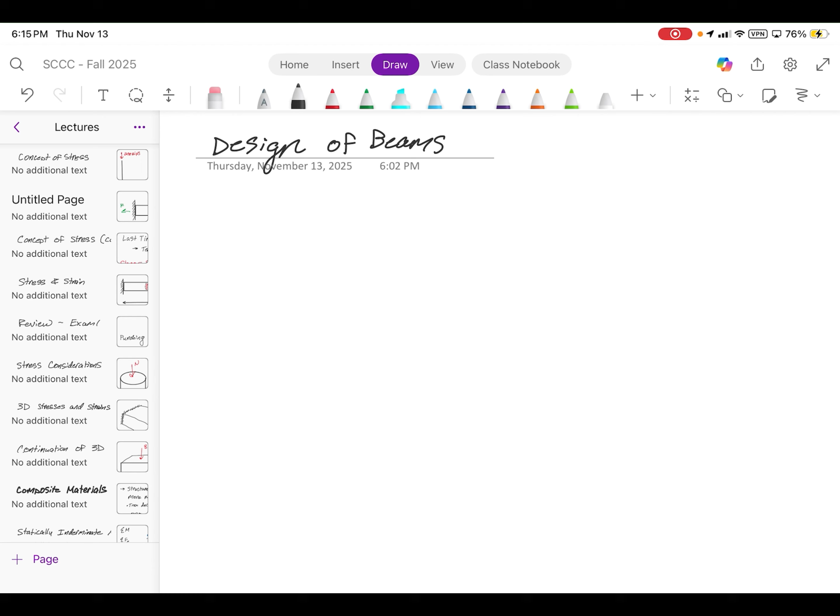So what are we doing after this test? Because I think on the syllabus it still says code-based design. Yeah, that's all on the Excel spreadsheet. I didn't upload it, but basically the outline for the course after we come back from break, because it's literally just the exam next week and then break for a week.

After break, we are going to work on deflections and beams. We're going to be working with torsion in circular elements. And then if we get to it, column buckling. These are all after break, which also are going to make up exam 4. They're just kind of miscellaneous topics.

Like I said, I wish I could put deflection of beams on the exam because it relates to the stuff we're doing right now, but I don't want to throw too much on there.

So at minimum, it's going to be deflection of beams and torsion, which torsion in itself, according to Professor Simon, out of all the years he's been teaching, has been the worst for students because they don't get it. They don't see that there are rotational forces parallel to the cross-section of the elements. It's also like introducing something new, where in statics you learned moments and forces, but now you also need to know torsions. But it's all the same concept - as long as you understand equilibrium and internal forces, you should be good.

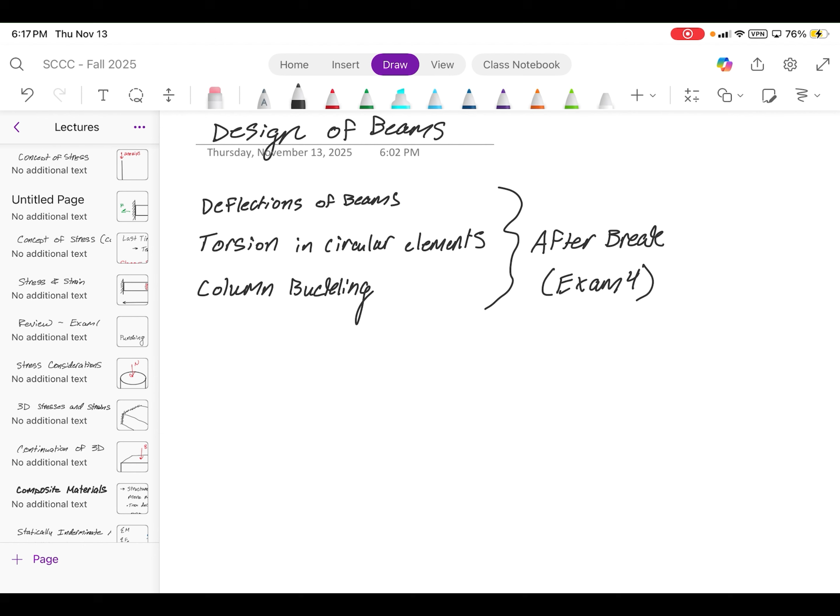All right, so let's just get straight into this. Let me grab taking notes. I just want to see what I've covered previously. So for beams, let's just start out immediately with another example.

All right, this is going to be something similar to what you guys did on the homeworks. And then I'm going to teach one more thing, probably after the break, which will be on your exam. But it's not too bad, I promise.

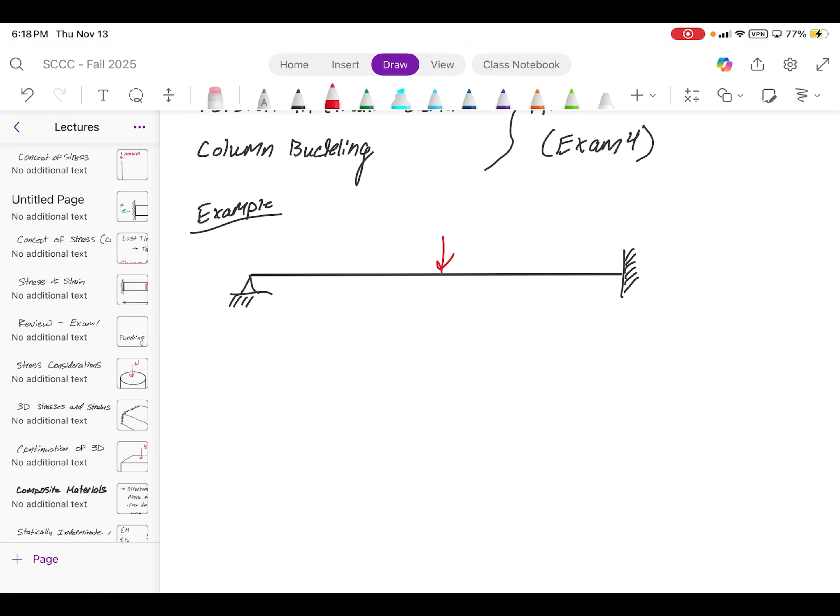This here, actually, I don't want that. What I want is actually that, with a point load here of 25 kips, and it is located 10 feet and 10 feet. Now, this is a statically indeterminate beam.

Generally, you would need to know compatibility and do the deflections in order to solve this, just as we did with statically indeterminate bars. However, for beams, I am going to simplify things tenfold and only ever give you statically indeterminate beams that will require tables.

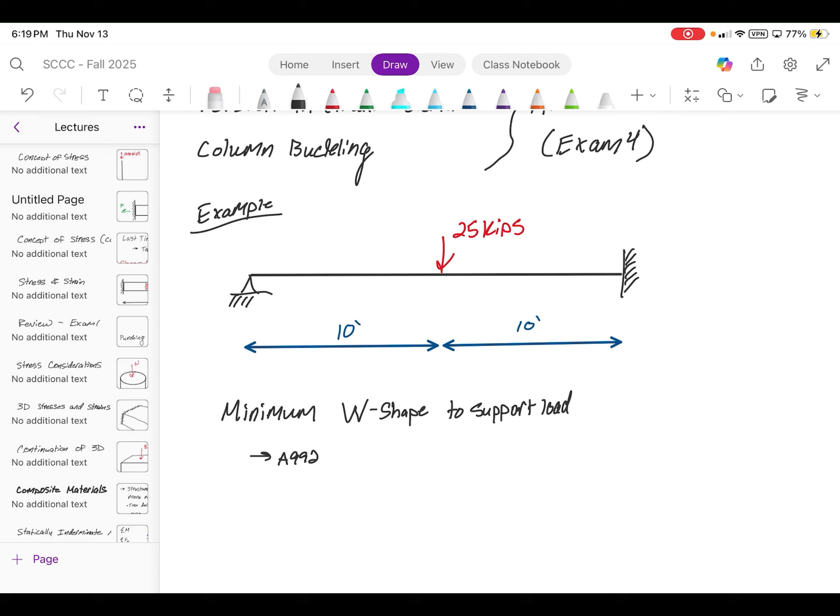So you can use the tables to design the statically indeterminate beam. It may be a combination of forces, or it may just be one force like this. It's just a matter of figuring out what the correct value is. But what I want you guys to do is determine the minimum W shape to support the load. I want the shape to be A992 steel, and I want a factor of safety equal to 1.5.

So I'm going to give you guys a few minutes just to determine what the W shape would need to be, and then we'll work it on together and see if the answers you get make sense or if you just killed 1,000 people in a building.

Yes, I just have a question about this. Sure.

So for this, it's like there's a wall in it. Exactly, it's a fixed end beam.

But then how do I decide if it's negative or positive? You would need to draw out the diagrams, or you can look at the table, and the table will generally tell you. If you look at the design force table, it'll tell you the magnitude and the direction and everything of the forces.

So if you were going like this, can you just go straight to the table and do M max? Exactly. So you can figure out what M max would be.

Guys figure it out? It's a statically indeterminate beam. What did I just say about if I gave you guys a statically indeterminate beam? Wrong chart. I remember now, you weren't here when I gave you the table, when I gave out the tables. What chart am I supposed to be looking at? Oh, look at that, yes, so here you go.

I'll just print out myself another one, but those include a bunch of shear force and bending moment diagrams for typical cases. Of course, I can give you guys a very complicated load case scenario that won't be in the table, in which case you would still need to know how to draw it, but that just helps with the design. I see, this is so helpful.

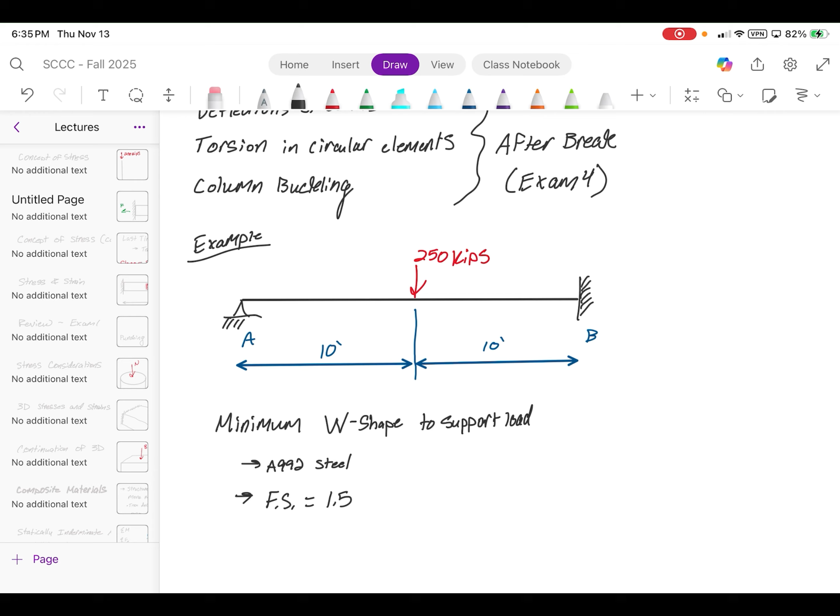I want to hear what you guys did. What did you guys do? What figure did you use? Figure 16. You used figure 17, I would have used figure 16. The reason being is because it's located directly at the center, so it would have made the numbers a little easier. But figure 17 would still give you the same answer as long as you did it correctly. So let's go with figure 16.

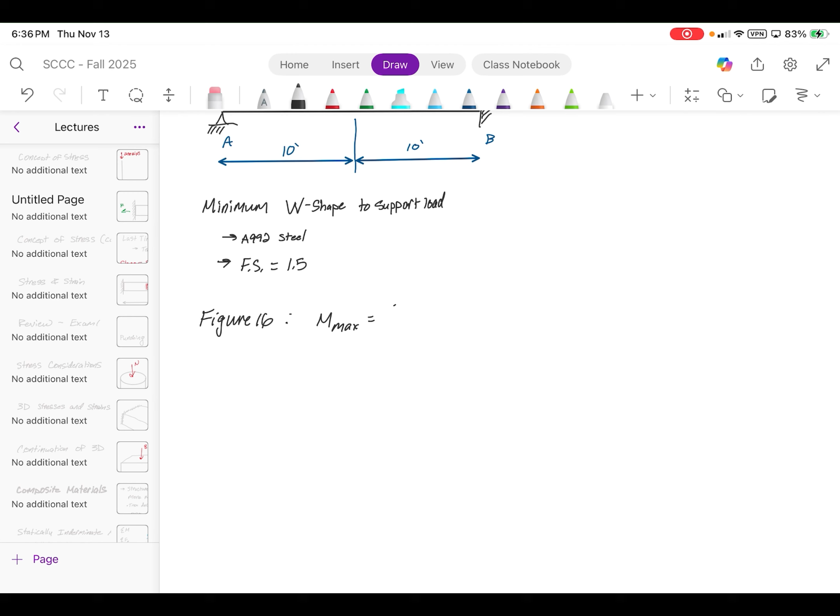For figure 16, the maximum bending moment, M max, is equal to 3PL over 16, which is just going to be 3 times the 250 kips times, what's the length going to be? What is L? 20 feet. Did somebody say 30? I did not say that. I said clearly, you saw my picture. And what do we get for the maximum bending moment?

I need my calculator. What did you get? 937.5 kip feet. See, now that seems high. But 93.75 kip feet seemed low. I know what happened, I think I know what happened. The reason being, probably shouldn't have changed the number then, because now I realize this section is going to be massive. So, did you multiply the bending moment by 12? I got that too. No, you told us at first that it was 25 kips. I know, we didn't convert it into inches. I got that, that explains why. So ignore what I said about the 250.

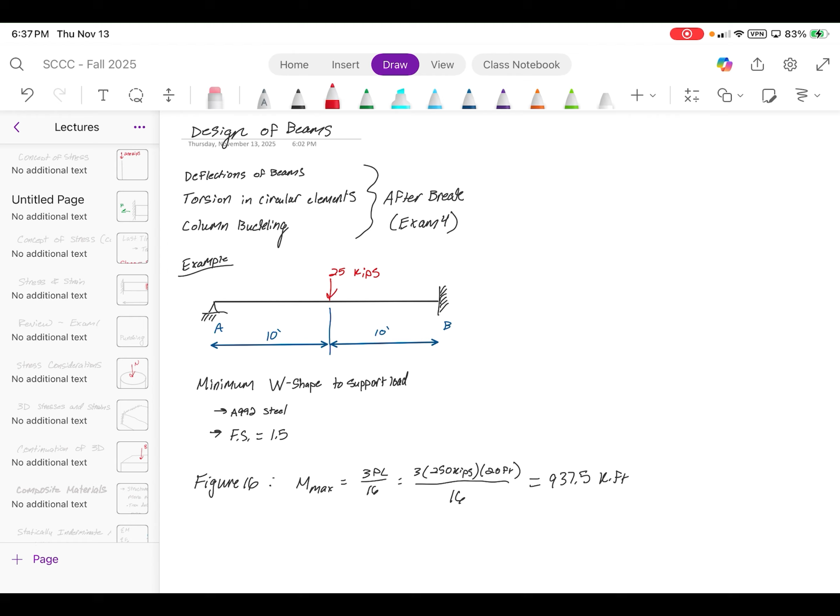Michael, don't worry. So instead of it being 937.5, it should be 93.75 kip feet. Now, when you're designing, you got to keep everything in consistent units. So what you need to do is multiply this by 12 inches per foot so that the feet cancel. What do we get for the bending moment then? Well, I did that last. I didn't bring my calculator today like an idiot. 42.5. Oh wait, here it is, there we go, it's buried in my bag. So 93.75 times 12 gives us 1,125 kip inches.

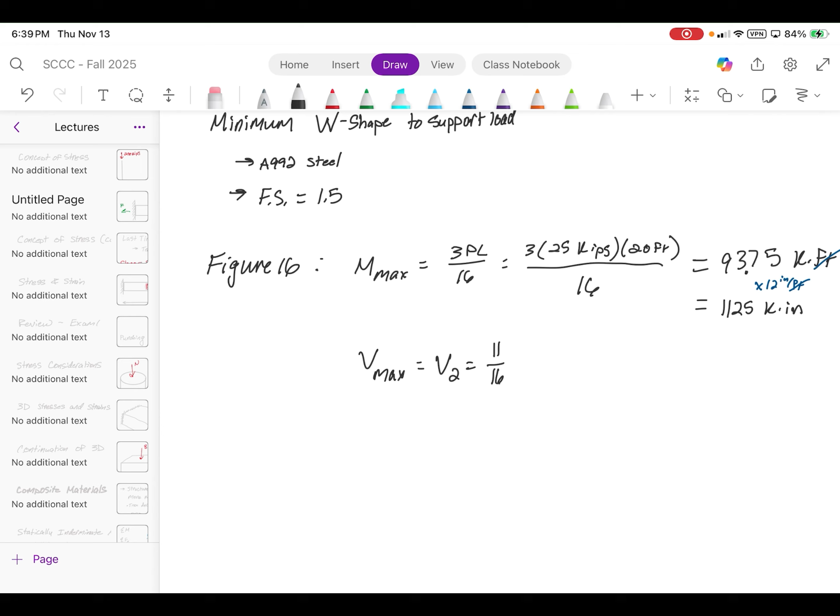Now we also need a design shear force. What is our design shear force going to be? It's going to be either V1 or V2. So V max, we just look at this, is just going to equal which one, V1 or V2? Anyone? Design shear force, because you don't only design for beam bending, you have to check shear as well. Is it V1? What? Is it V1? Nope, it's V2, because it has the 11, it's 11 over 16, which is greater than 5 over 16. So you would use V2, which would give you 11 over 16 times P, which was the 25 kips.

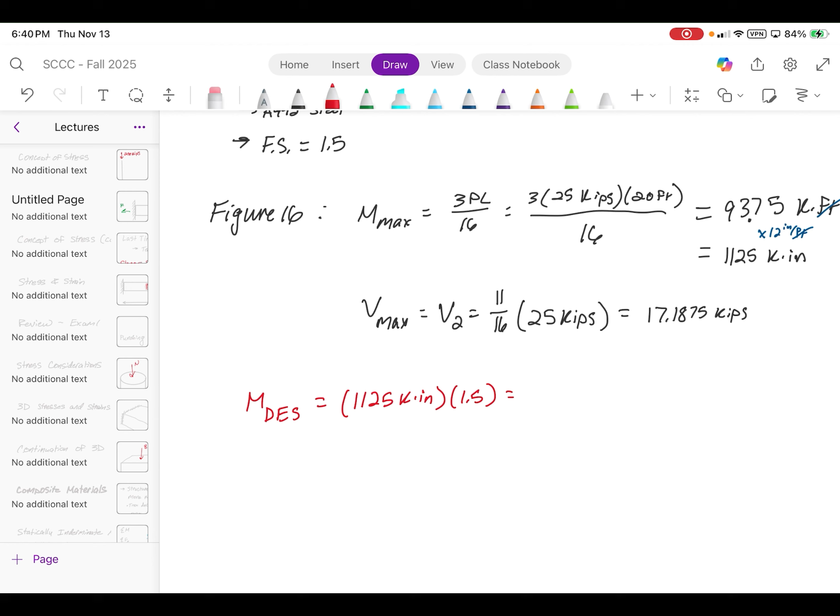Which is the 17.1875 kips. Now from here we determine our design forces. So M design is just going to be our maximum bending moment, the 1,125 kip inches, multiplied by the factor of safety, which we specified was 1.5. So 1125 times 1.5 gives us a design bending moment of 1,687.5 kip inches. Our shear force for design is just going to be the 17.1875 kips times the 1.5 factor of safety, which gives us a design shear force of approximately 25.78 kips. I don't feel like writing out all the decimals, and besides that would be like 1.25 pounds difference, so it doesn't matter at all.

All right, now that we have our design shear force and design bending moment, how do we size out our sections?

How do we do it for bending? What's the equation we need to use? We can use S equals M over sigma. So you would use the stress equation, which tells us sigma is equal to M over S. But you have to rewrite it to say that S is equal to M over sigma.

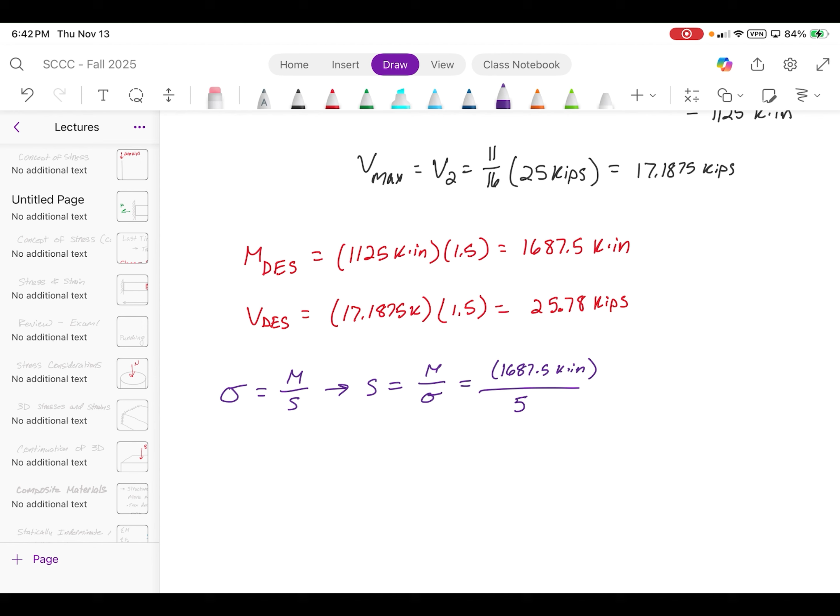And so that gives us 1687.5 kip inches. And then what's sigma going to be? 50 KSI. Why is it 50 KSI? Because that's the yield strength of A992. Exactly. Sigma y is equal to 50 KSI.

So we take that 1687.5 divided by 50, and we get a section modulus of 33.75 cubic inches.

Where do we go from here? You go to your design tables and you figure out what shape you need to use. I have misplaced it now. Where is this one now? Here it is. You go to your design tables, you figure out what W shape has a section modulus of, at minimum, 33.75.

And I already see 1, 2, 3. I see a few. What would you guys use? W12 by 30. You would use a W12 by 30? Okay, anyone else? Any other suggestions? W10 by 33. You want to use a what? W10 by 33. Okay.

All right, let's work with W10 by 33, which gives us a section modulus SX of 35 cubic inches, which is greater than the 33.75. So this tells us the beam works in bending.

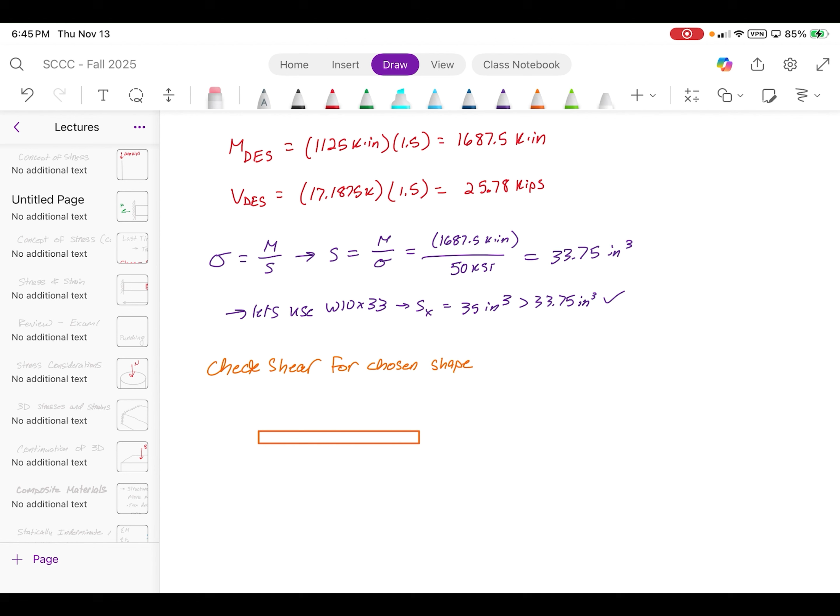So what did I say about the design for shear in W shapes? If you guys remember, when we had a W shape that looked just like this, there is shear force that develops in the flanges at the top and the bottom, but the shear force is generally very small. So when we design for shear in W shapes, usually we just entirely neglect the flanges and we just take the area of this web here.

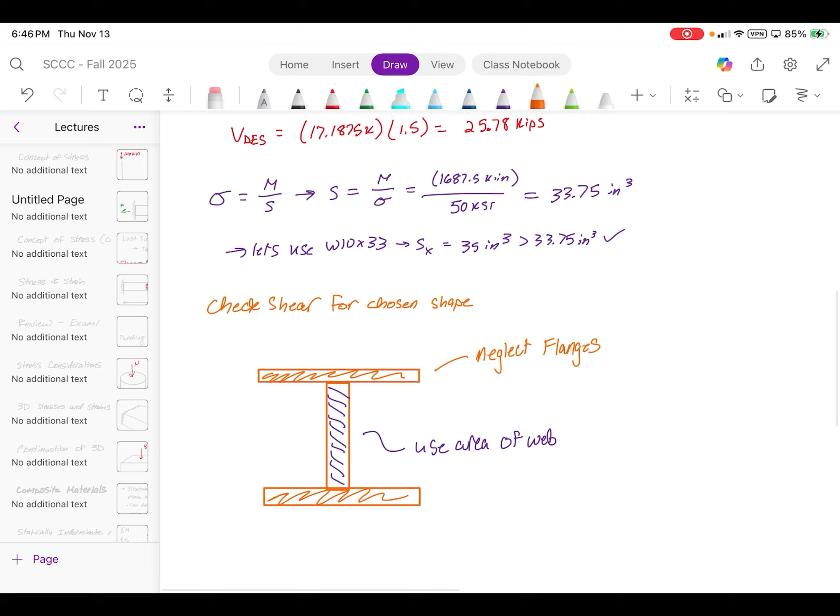And hence, when you find the area of the web and calculate the stress for that, we call this the average web shear approach for calculating shear. So we need to use the average web shear approach.

I am assuming that nobody got to the calculation of the shear stresses, so we'll do that together really quick. Shear stress in a conventional shape for beams subjected to flexure is usually VQ over IB. However, because of the deviation and the fact that we're making this assumption about the average area in the web, we can approximate this to just say V over the area of the web. That stands.

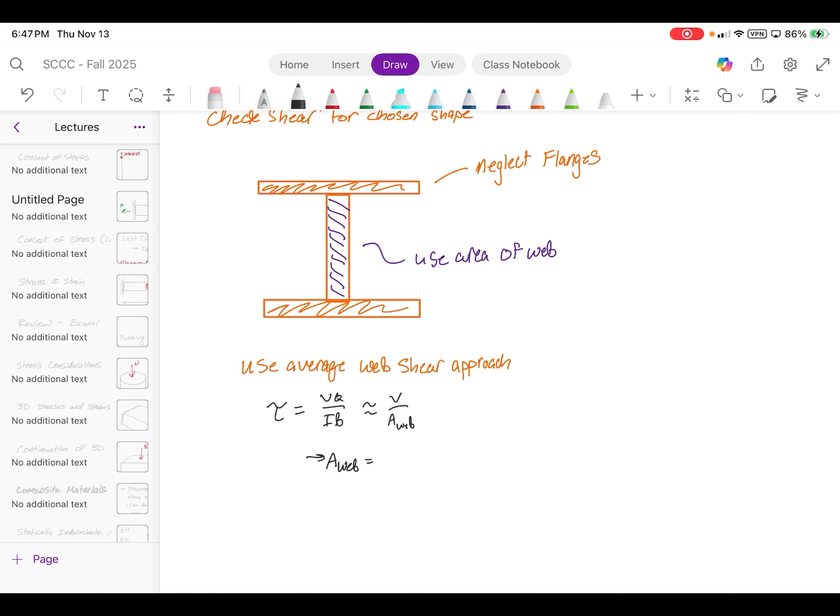What is the area of the web going to be? What? Nope, because that's the area of the entire cross section, including the flanges. At that point now, you're overestimating the area of the web. So the way that you calculate the area of the web is you need to consider the height here.

We'll call this dV. This dV is equal to the depth of the overall beam minus the flange thicknesses, which, because you have two flanges, you subtract two flange thicknesses. Does that make sense?

And then the area of the web is just going to be that value dV that we calculate multiplied by the thickness of the web, because that's just a square.

So the depth D, what is the total depth of the W10 by 33? It's 9.73 inches, right? Do you guys see that? Total depth of the beam. Yeah, so it's that 9.73 inches.

And then what is the thickness of the flanges? What do you guys get? 0.435. And so we calculate this, and you get 9.73 minus 2 times 0.435, and the depth is just 8.86 inches.

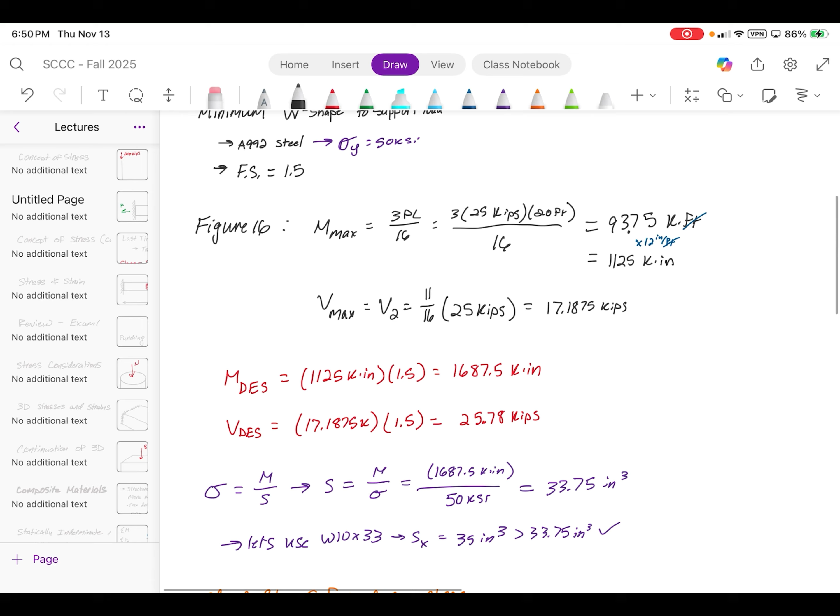So from here, you plug in the shear force, which we said was 25.78 kips, and then divide it by 2.57 inches squared, which gives us a shear stress of around 10.03 KSI.

Now, what is the shear strength of the steel? One thing you'll notice is your table doesn't explicitly give it to you. So one thing I'll allow you to do is write a note that the yielding capacity for shear for structural steel members like W shapes is approximately 60% the yield strength, which you'll see when you take 36 and multiply it by 0.6, you get 21.6, which they round down to 21 kips per square inch.

If you were to do it for grade 50, you'd get 50 times 0.6, which gives us a shear strength of 30 KSI, because this value is 50. Hence, because this 30 is greater than the 10.03 KSI, our design is good. Any questions about that? All right.

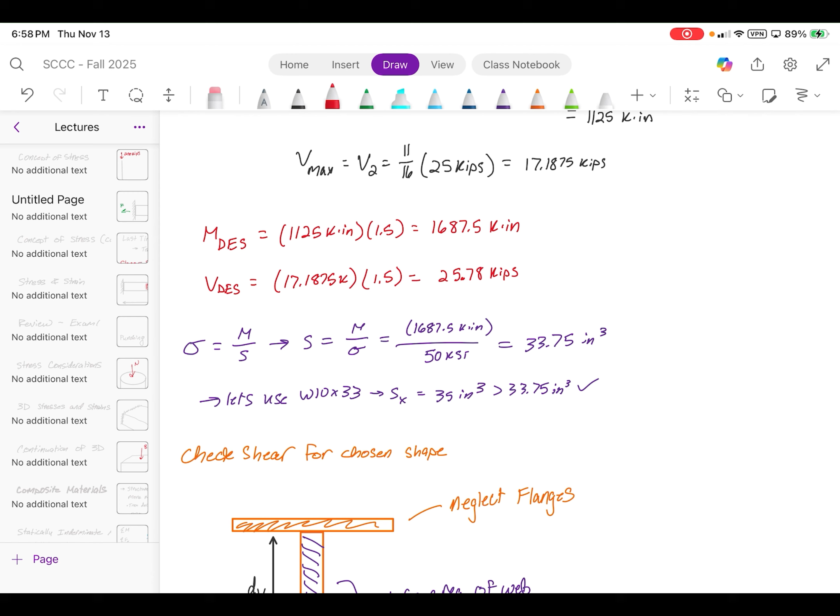And as you can see here, what was the area now? I'm going to add this web shear approach. We said that the area of this web was equal to this times this, which is inches squared, which means shear for this would have been equal to that divided by this, which I'm just going to plot this really quickly.

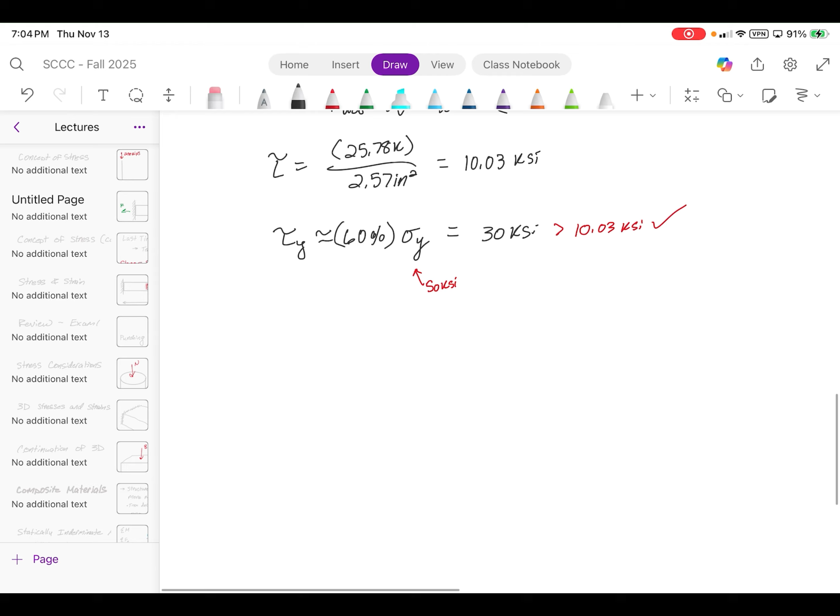So, what did we learn? Basically, let me just come back here. I will upload the, whoops, come on, why is this off now? Yeah, here we go. So basically, we get that for rectangular shapes, tau max is approximately 3 over 2 tau average, which is just your V over A equation. And then for W shapes, tau max is approximately the shear force divided by the area of the web.

I'll just draw a little diagram here. This is B, this is H, and then this whole thing here is AG. And then the area of the web here is just this area bounded in here, where this dimension is dV, and dV is just equal to d minus 2 TF.

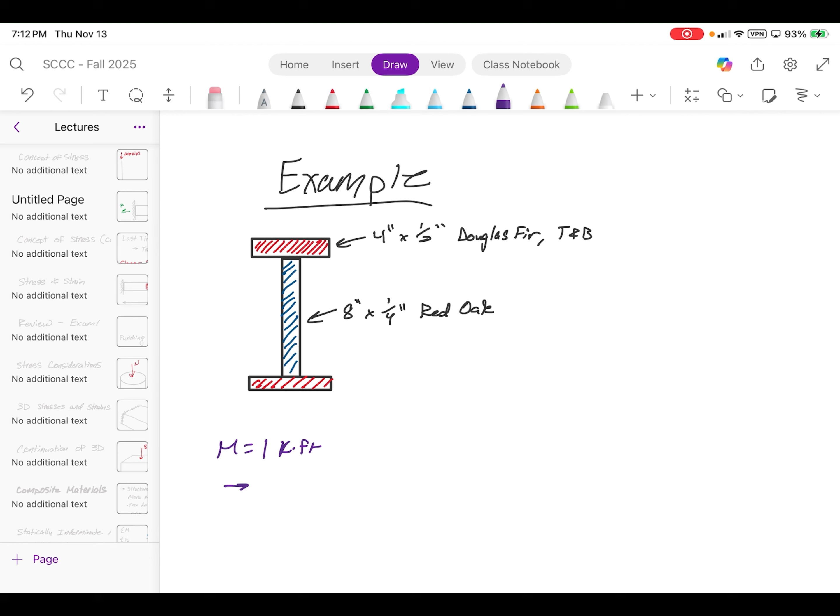This problem's now a composite problem for beams, for flexure only, which we did cover previously. It just involves transforming one of the sections.

Don't make it red oak. I want this to be shagbark hickory, and this I want to be western hemlock. Yes, shagbark is a genuine wood, apparently. It's in your packets.

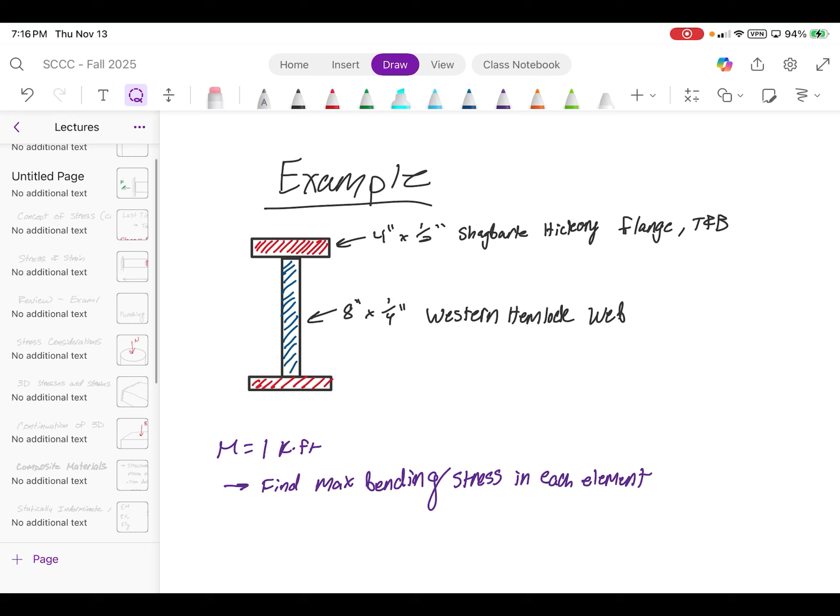And I want you to find the max normal stress, or bending stress, I should say. I'll give you guys about 15 minutes to do this. We did an example of composites last class, so it's just following a very similar procedure. I think we did it last class, but I'll need to double check. Let me see... yes, that we did. Composite beams.

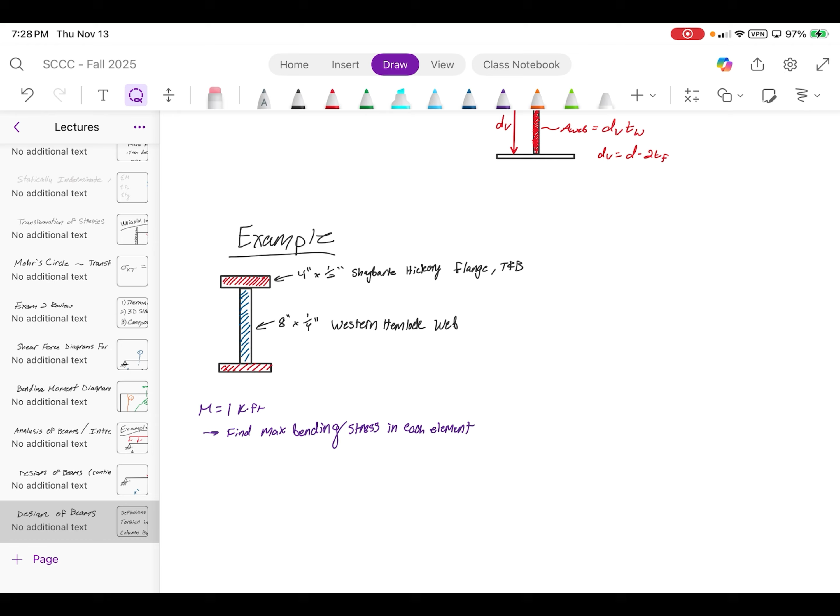Should we just work on it together? Okay, see how it's done. So, did you guys at least calculate what the modular ratio needed to be? What did you get? It's just 1.375. It's unitless, because you're taking kips per square inch divided by kips per square inch, so your modular ratio is always unitless.

All right, then from there we want to determine the section properties. So this is just going to be our components tab—we need an area tab, a Y-bar tab... screen is frozen, of course it is.

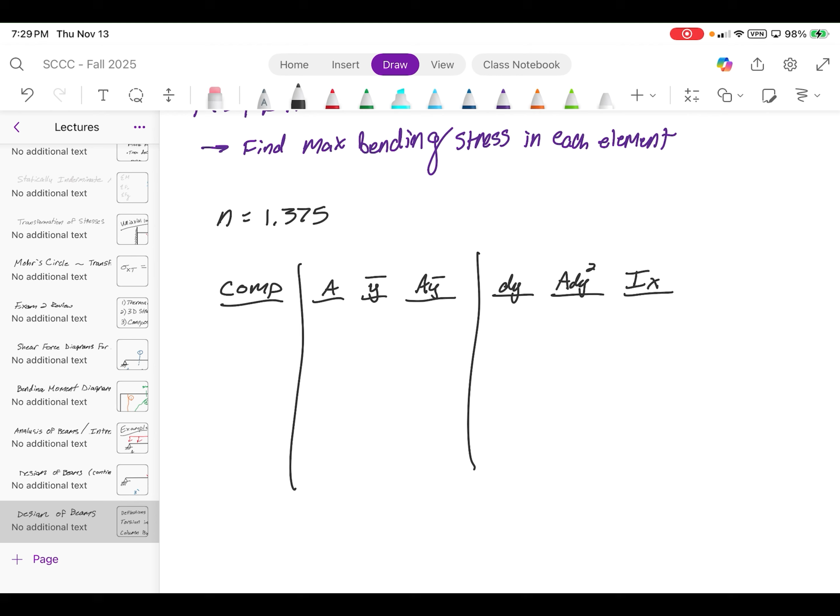So I've got a component, A, Y-bar, an A Y-bar, and then once we determine that, we've got a dy, an A dy squared, and then a separate IX. However, there's one thing that's nice about this problem.

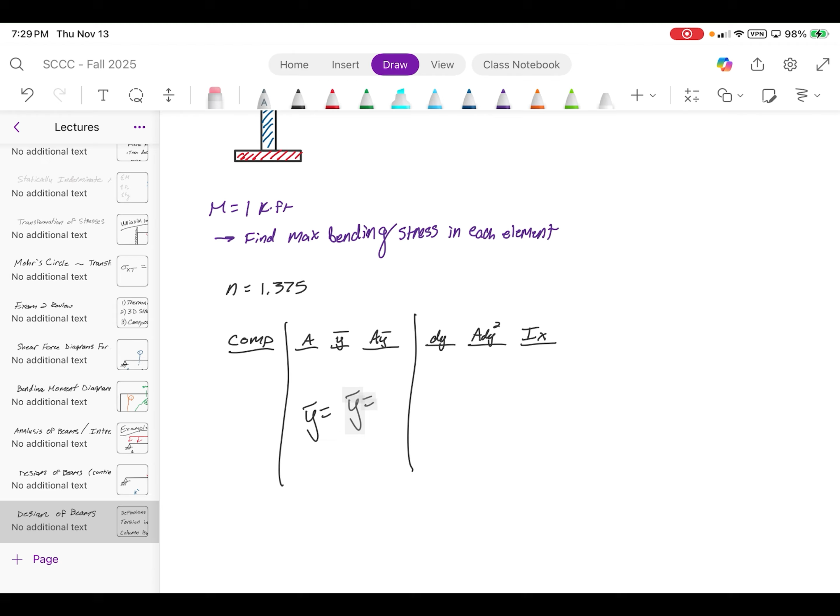Where's y bar? Did you guys figure that out? What do you guys notice about the shape? Symmetric. Where's y bar then? It's at the center. So you could just say y bar is equal to... that's going to be a half inch. So y bar is equal to half an inch, because that's this dimension here, plus 4 inches. So it's just going to be 4.5 inches.

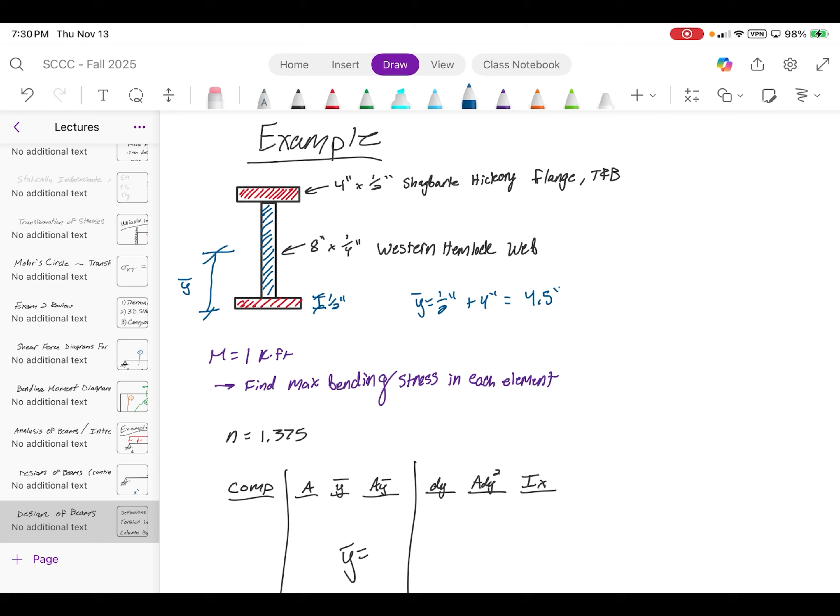One thing we still need, though, is the areas. So let's get the top flange, the bottom flange. I'll actually do top, web, and bottom flange. Area of the top flange is going to be 4 times 0.5, which is just going to be 2. The area of the web is 8 times 0.25, so that's just 2. And the area of the bottom flange is just 2.

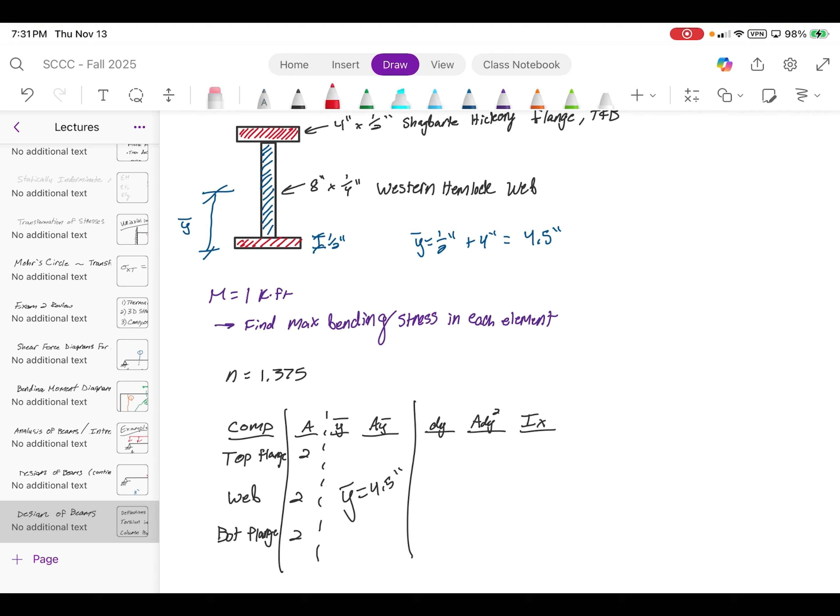However, we want all of this to account for the material variation. What did I say about multiplying the modular ratio by the area? So what we want to do is transform this. We take that 2 for the top and bottom flanges and multiply it by the modular ratio n, which gives us 2 times 1.375, an adjusted area of 2.75.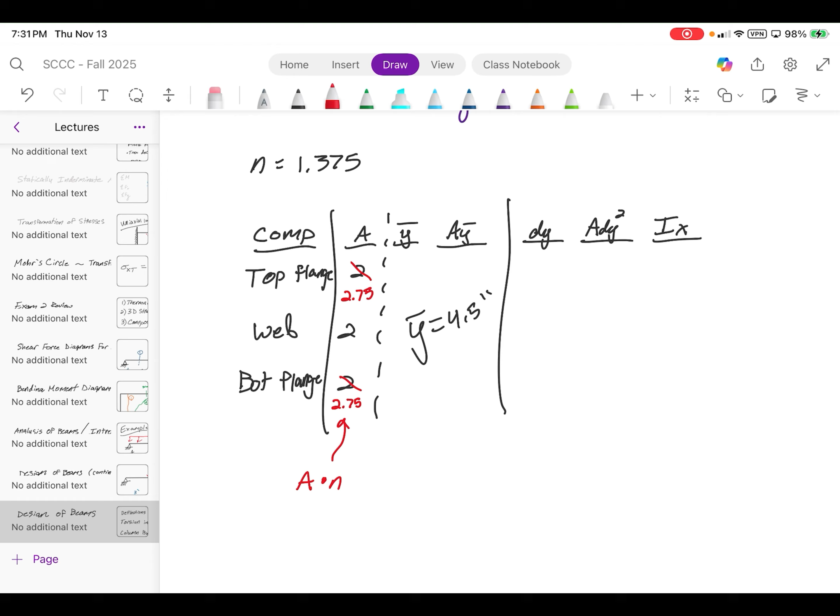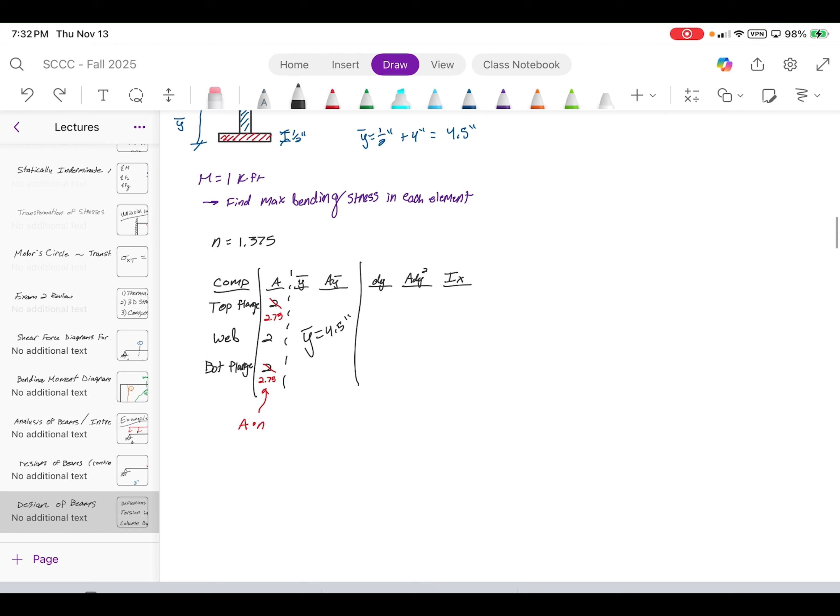And what this does is, instead of it being red and blue as we see up here, I'll show you guys in a second. What this does is it transforms - and when I mean transform, I mean it literally creates an equivalent section giving equivalent properties. This isn't like paste... oh my goodness, I'm losing my mind. I wish I knew how to paste text on here. Sometimes I can do it, sometimes I don't. So you guys will just have to deal with me drawing it really slowly, sorry about that.

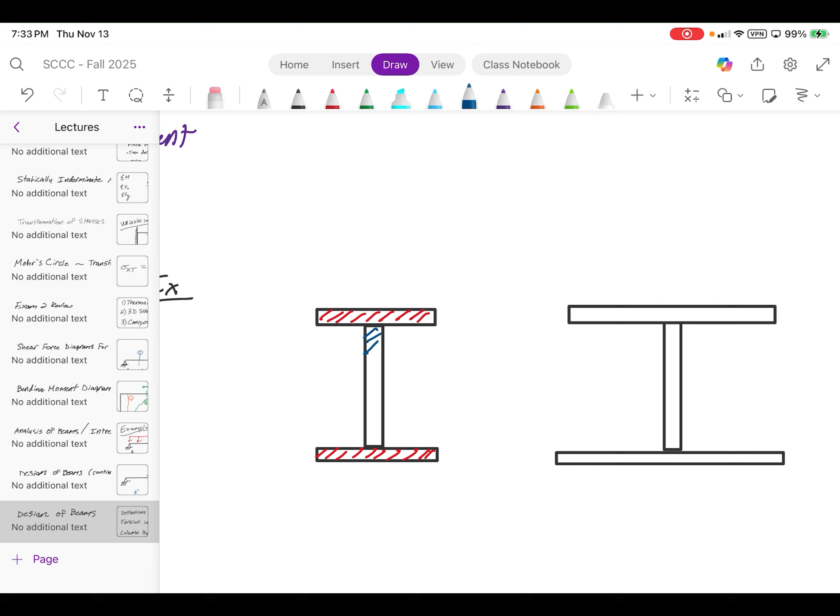So that's flange 1, web, and then flange 2. And what this does is it basically takes the flanges here and basically gives it an updated area. So if this is the red flanges here, and then this is blue here, guess what? By multiplying the red by n, we get equivalent dimensions or equivalent areas here, where this entire cross section is just now blue. Does that make sense?

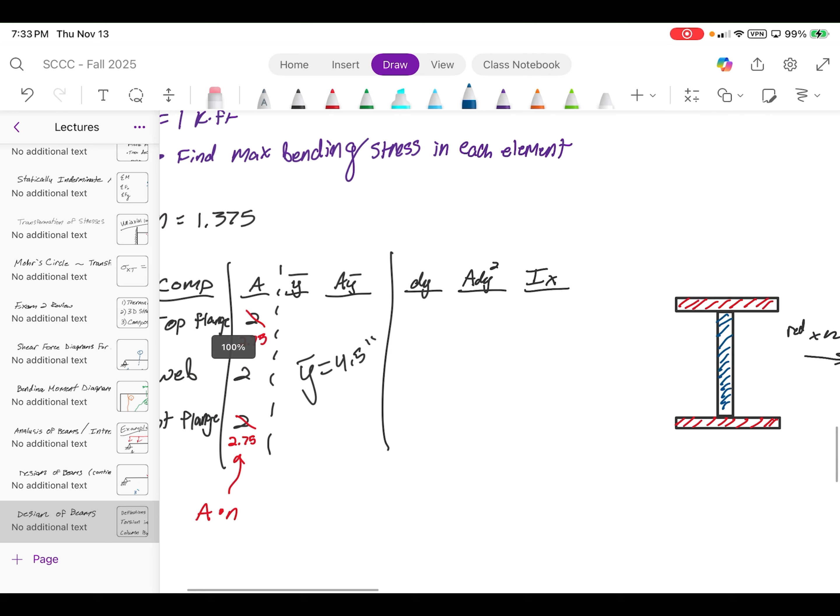So the area of these flanges now is just 2.75. And that's what we're ultimately doing - we're accounting for the stiffnesses by replacing them with an equivalent area that would cause the same amount of same behavior.

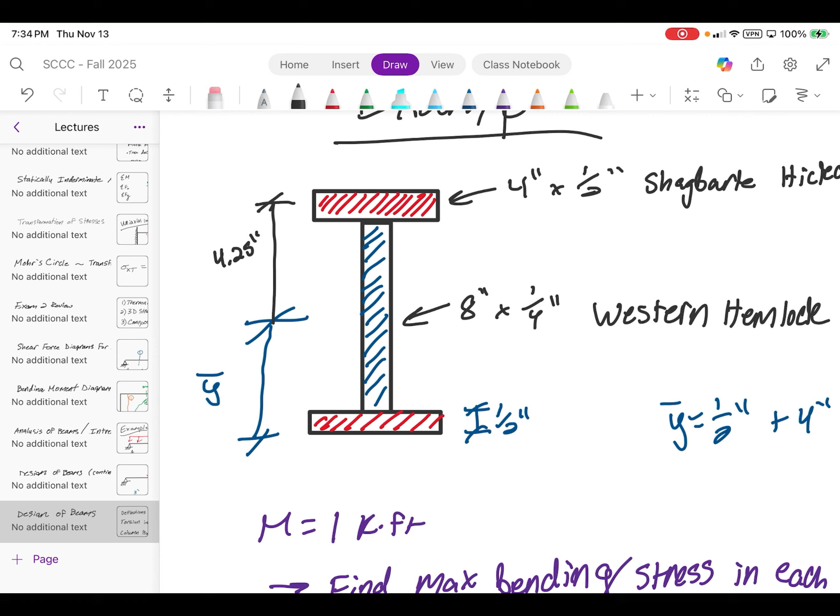From here, we need dy. Where is the location of this with respect to the neutral axis? Well, it's just going to be 4.25 inches. Does everyone see where I get that? 8 inches is the height of the web, divided by 2 gives you 4. And then you need to add half the flange thickness because we're trying to find the center of the flanges, which gives you 4.25 inches. Does that make sense?

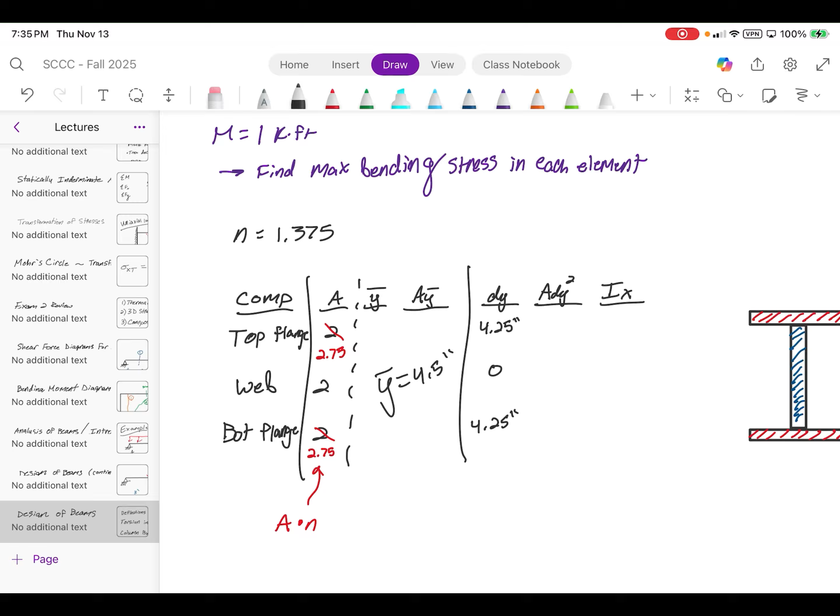All right, so this becomes 4.25 inches. Where's the web with respect to the neutral axis? How far away is it? Zero, yeah, because it's at the neutral axis. So that's 0 and 4.25 inches. And so from here, we just take the area and multiply it by A dy squared. So 2.75 times 4.25 squared gives us 49.67. That's going to be 0, and then 49.67.

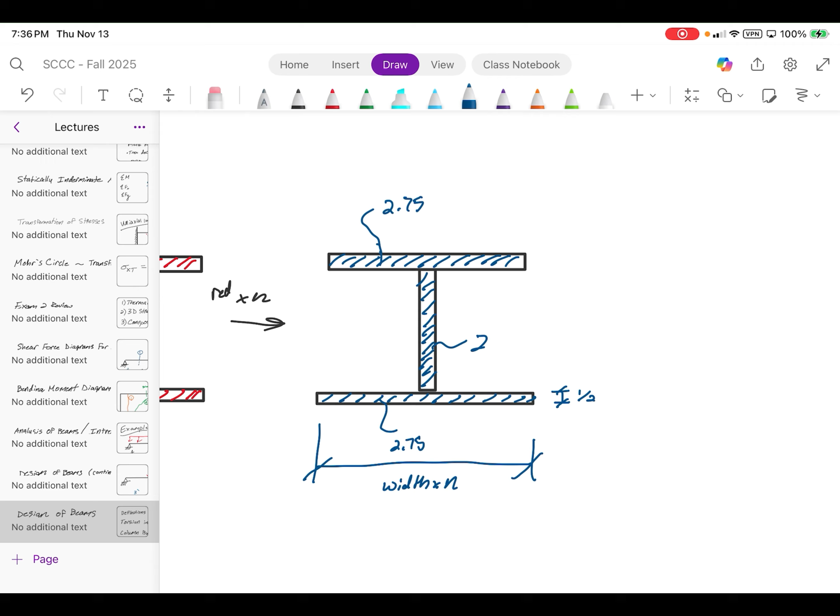And then because these are all rectangular shapes, we use BH cubed divided by 12 for IX, which is just going to give us the updated properties. So what we need to know is this width here, the updated width. The trick with this is knowing that this is still going to remain as half an inch, which means that this is technically the width times n. So the width of the flange was initially 4 inches, so it's 4 inches times 1.375, which gives us a width of 5.5 inches.

And so this becomes 5.5 times h cubed, h being half an inch, divided by 12, which gives us some really small number, 0.0573. This becomes a quarter of an inch multiplied by 8 inches cubed divided by 12, which gives us 10.67, and then this is just the same.

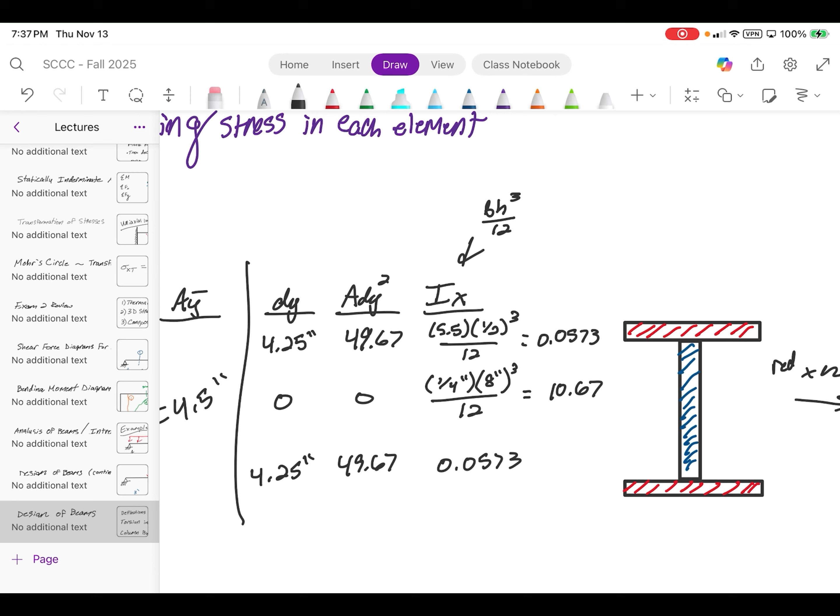And so you sum this whole thing together, you get 99.34 on the left, and then 10.78 on the right. And so your IX total becomes 110.12 inches to the fourth.

Does everyone follow along with this? It's basically just statics. The only thing you're doing now is multiplying certain things by the modular ratio to transform things.

Any questions about this procedure, what we did, why we did it? How do you know when to multiply by n? Depends on what material you're transforming to. So if you have more than one material, you're always going to multiply by the modular ratio? Yes. Now it's just a matter of knowing what material you're transforming to.

In this case, you are taking the stiffer material on the top and the less stiff material on the bottom, which means you are transferring from stiff to less stiff. So whatever's on the bottom is always what you're transforming to.

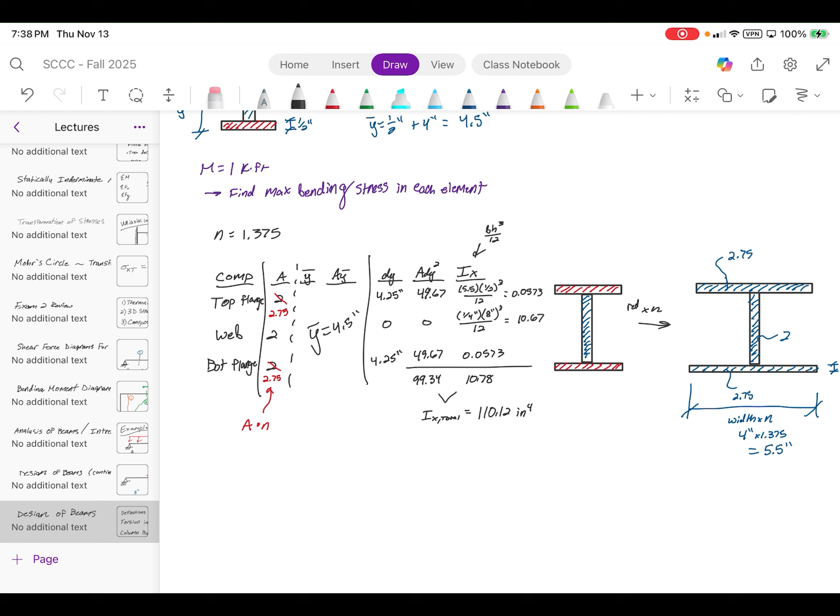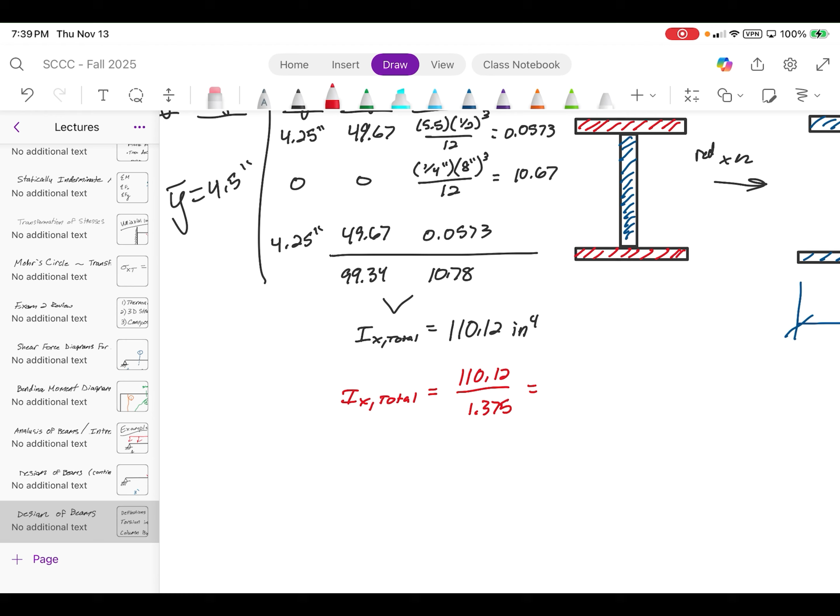Now, if we wanted to find the equivalent second moment of area of inertia that would transform everything to the shagbark hickory, then you would just transform everything the opposite direction, right? Which conveniently is just going to be the 110.12 divided by the 1.375. And that's because now you're transforming this entire cross section to everything red.

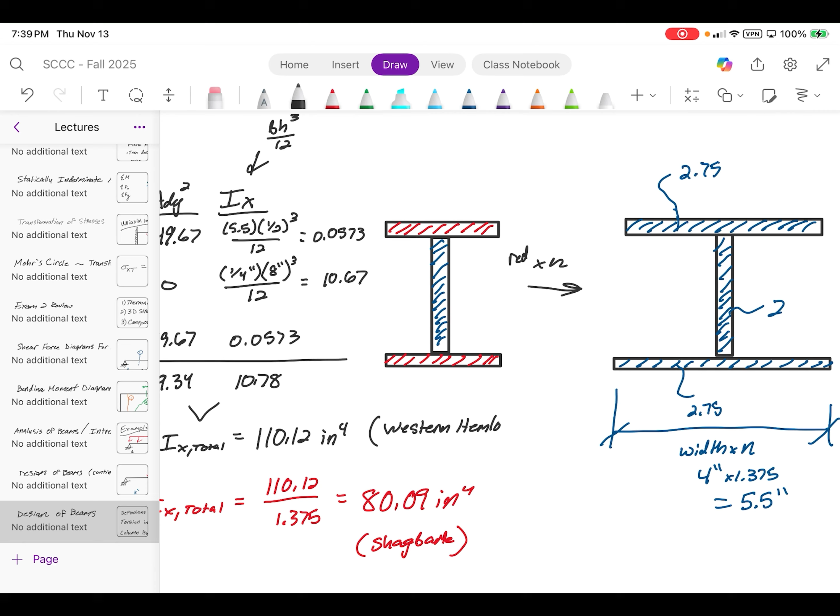So this is for shagbark, and then this is for western hemlock. But ultimately, the stresses that you calculate will be the same no matter what. It's just a matter of knowing how to manipulate the values.

Any questions about this? Are these the true second moments of area of inertia? No. In reality, it's like you can technically have two. It's just a matter of playing with the numbers a bit.

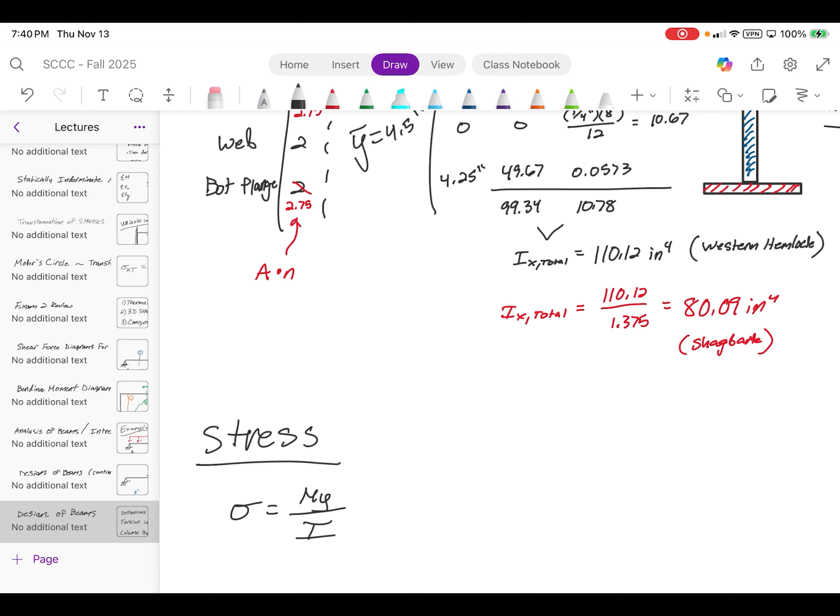So how do we calculate the stresses now? What we need to do is use our sigma equals My over I equation. This is a symmetric shape, so you could technically say you wanted to do M over S, but I wouldn't necessarily do that. Just avoid this step, it's less confusing.

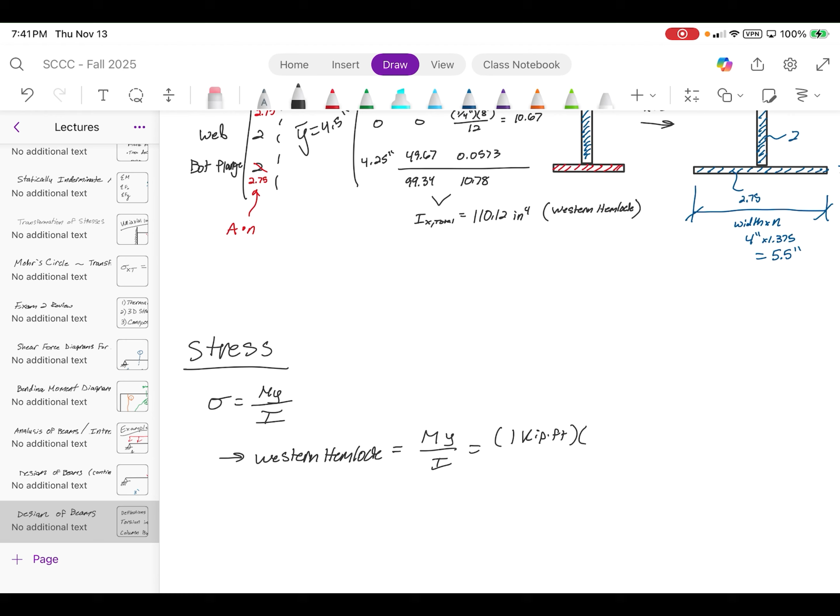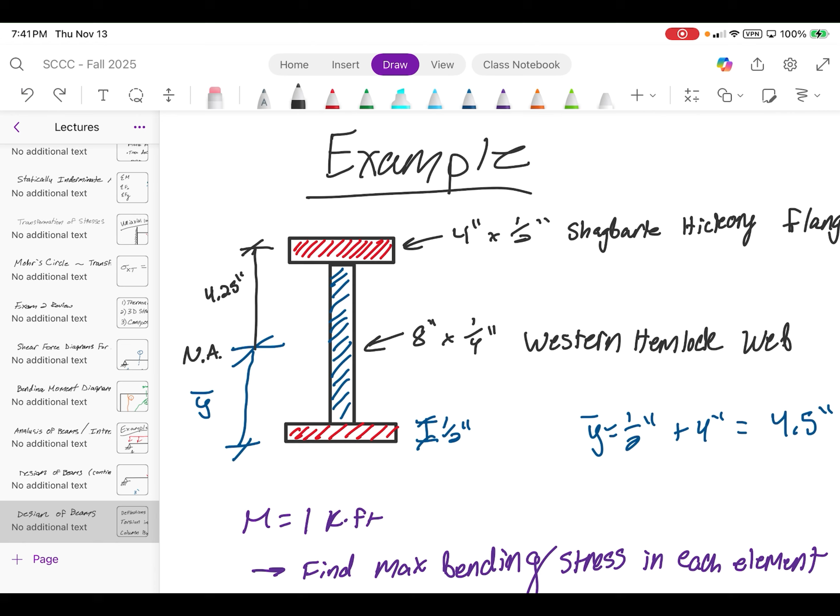So now we want to find the stress in the western hemlock. What we would get is My over I, which let's say we didn't know this shagbark second moment of area of inertia. What we would do is just the 1 kip foot times the y bar, which y is the location or the bounds at which the western hemlock goes. How far up does this western hemlock go? It only goes up 4 inches from the neutral axis, right? Because once you pass this point right here, it's not western hemlock anymore, it's the other wood. So y can't be any greater than 4 inches.

So we just have to multiply that by 4 inches. And then, of course, you want your units to be consistent, so multiply it by 12 inches per foot to get everything in terms of inches. And then your I is going to be the 110.12 inches to the fourth. And what we get is a stress of 0.436 ksi.

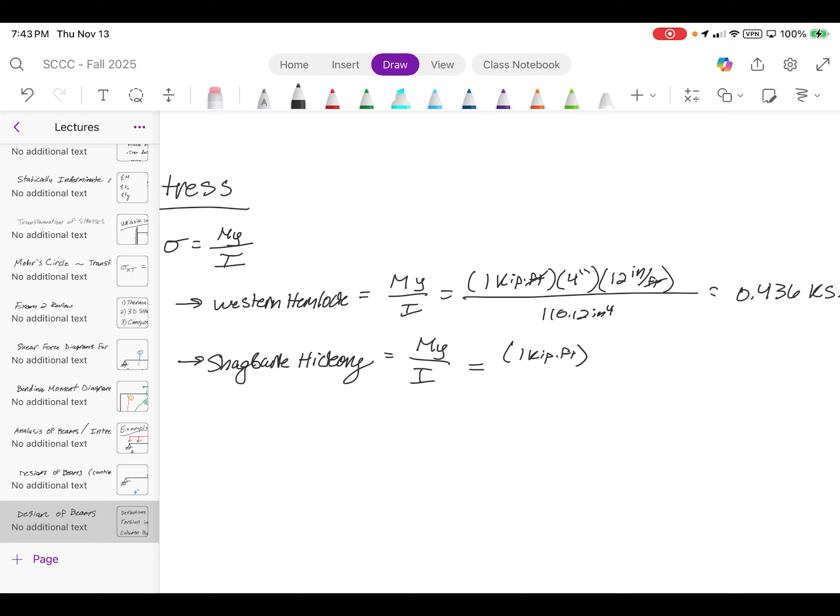Now, if we wanted to calculate the stress in the shagbark hickory, we again use My over I. But now the shagbark hickory is way above the 4 inches. The max stress in the shagbark hickory is occurring way up here. So you need to do it by multiplying it by 4.5 inches, and then divide it by I, which is 110.12 inches to the fourth. But now, because we are in the shagbark hickory, you need to multiply it by n, which is 1.375.

I guess another way you could do it - what did we say was the total IX for the shagbark hickory again? What was it? Did somebody write that down? All right, 80.09?

So you could do it that way, or you could just take the 1 kip foot, multiply it by the 4.5 inches, 12 inches per foot, and then just divide this directly by the 80.09. Either way, both answers will give you a stress of around 2.67 ksi. And you can feel free to fact check me on that. So that's really 2 methods of being able to do it.

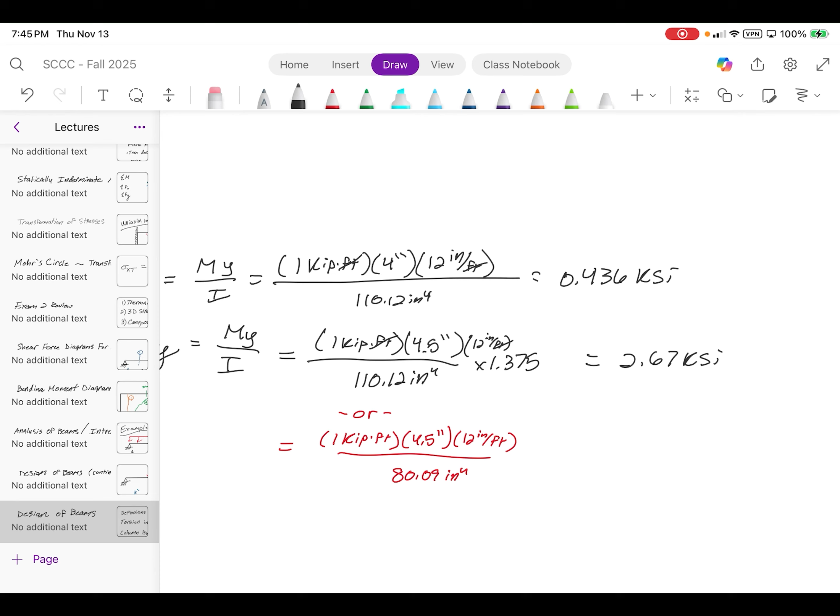Any questions about this at all? All right, now, if I asked you guys to plot how the stresses look or vary along the height,

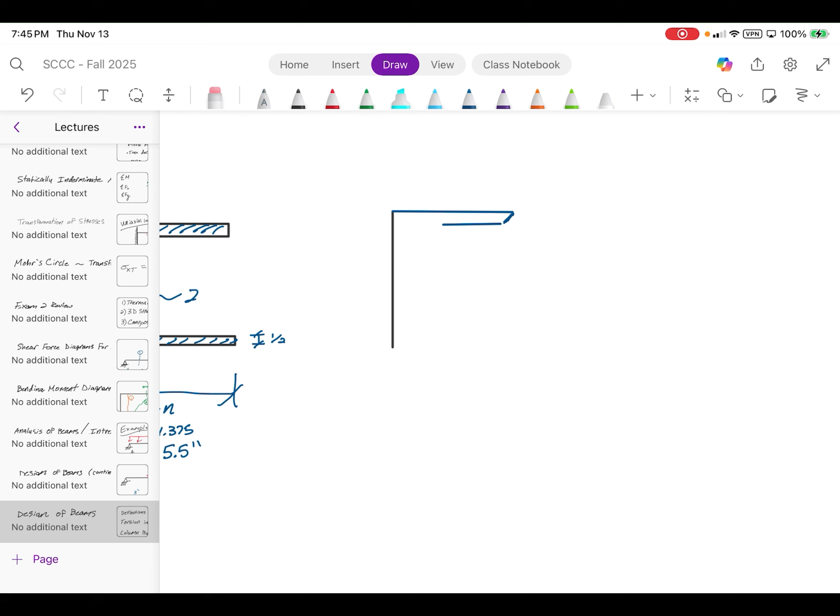Basically, the stress distribution would look kind of like this. You would have a positive bending stress here. It would be somewhat linear downwards. Then it would significantly drop to about here. Then linearly decrease across the neutral axis. Re-increase over here. Immediate jump again. And boom.

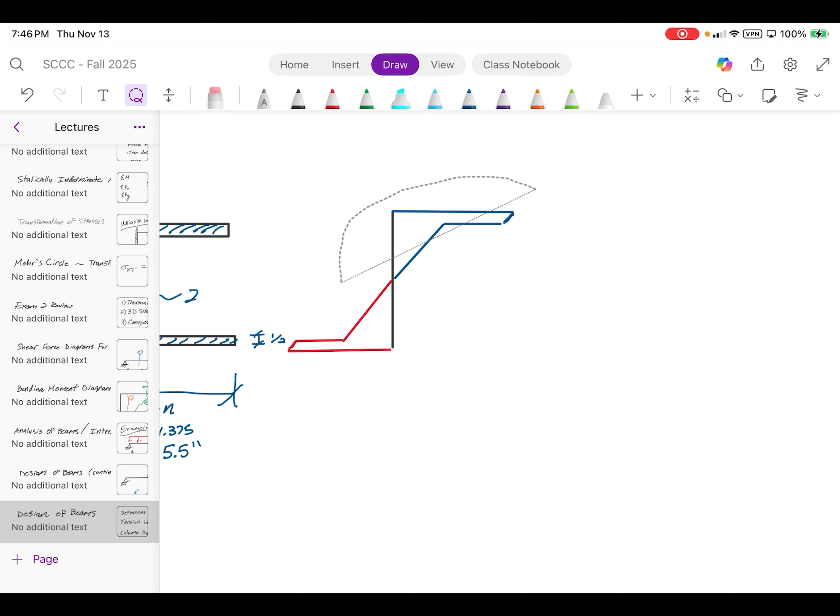So this value here is that 0.436, and then this value way up here is that 2.67.

Any questions about that at all? Do you guys think you'd be able to do this on an exam with practice? All right.

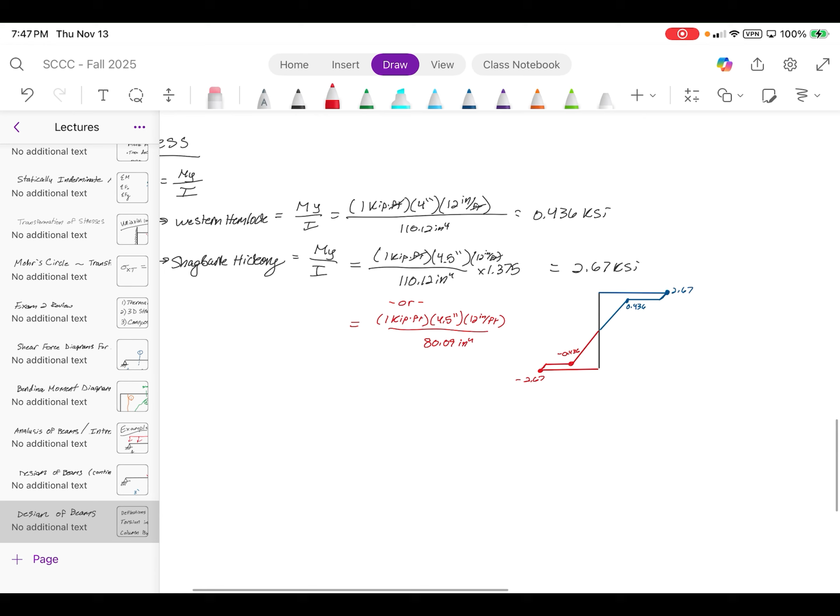Let's do another example now. Let's say instead I give you guys a T shape, just like that.

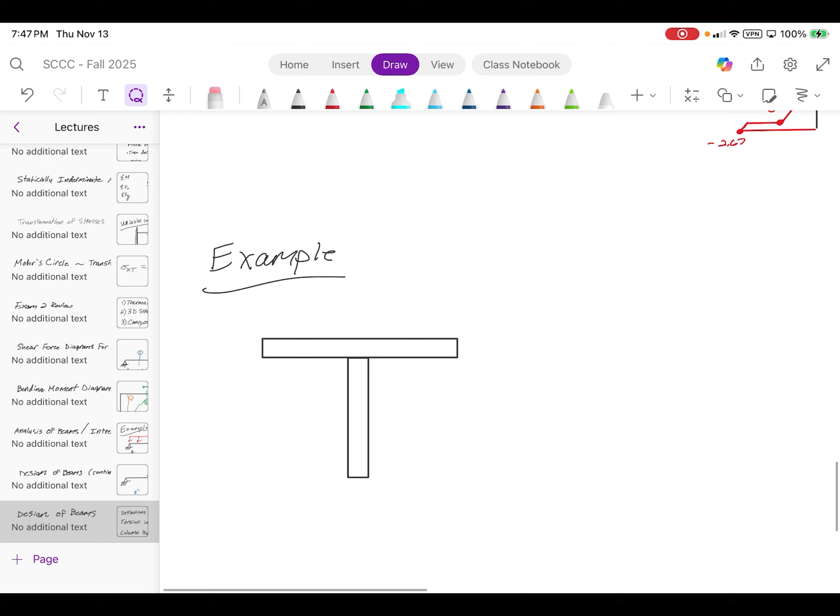And now this in the red, I'm going to say is A36 steel. And then this blue here is aluminum, Alloy 1100 H14. I'll say that this is about a 1/2 inch by 6 inch plate, and then I want to say that this is also a 1/2 inch by 6 inch plate.

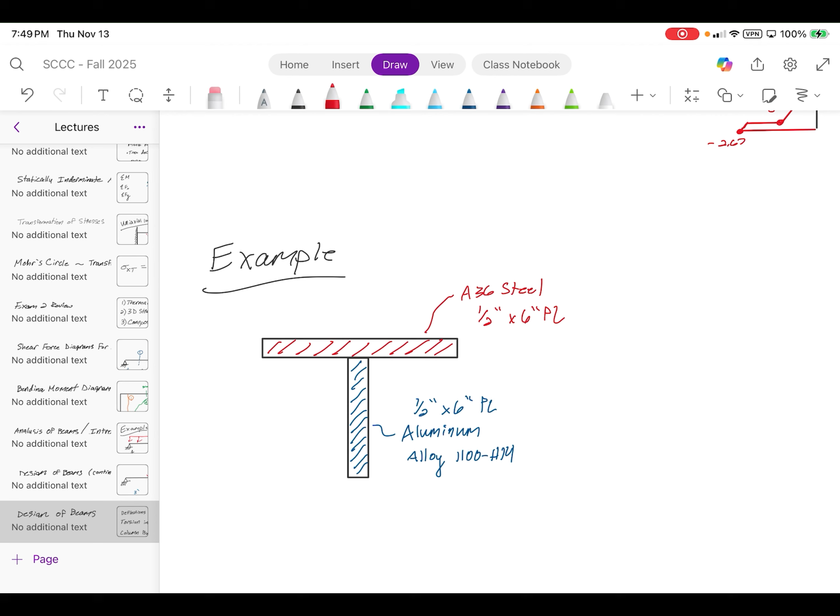So what I want you guys to do is find the second moment of area of inertia as both A36 steel and as the aluminum. I'll give you guys about 10 minutes to do that. Think you could get it done in 10 minutes? We just did an example just like it.

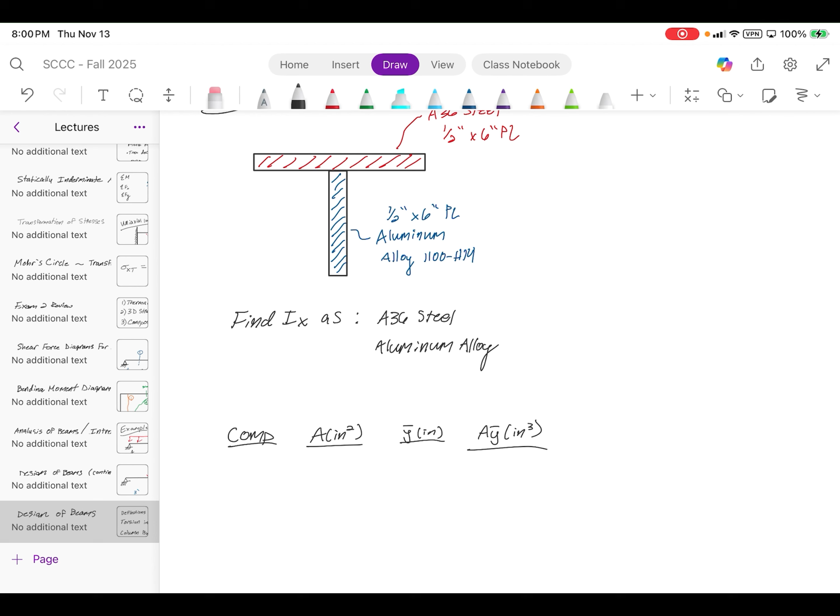All right, so what we first need is a components table. We need an A for units of inches squared. We need a Y bar, which is going to be in units of inches, and then an A Y bar, which is going to be in units of inches cubed. All right, we've got the flange and the web. Area of the flange.

So Michael, how did you do it? Did you transform it to steel? Did you transform the steel to aluminum? I multiplied N by the steel. Okay, how did you do it, Olivia? I transformed the aluminum into steel. All right, so what did you get for the modular ratio? I got 2.87. And what did you get for the modular ratio? 2.87. So you transformed the aluminum to steel, and you transformed the steel to aluminum.

And you both had the same modular ratio. One of you is right, and the other one is way wrong. Who's right? Olivia's right? Let's see.

So the modular ratio is equal to whatever we are interested in. So this is the current material to transformed. So we want to transform.

You said we wanted to transform. How do you guys want to do it? How would you do it? You said aluminum to steel, you did? I just did the stiff material on top. That's what you did, you did the stiff material on top. Yeah, I can see, 29,000 KSI over the 10,100 KSI.

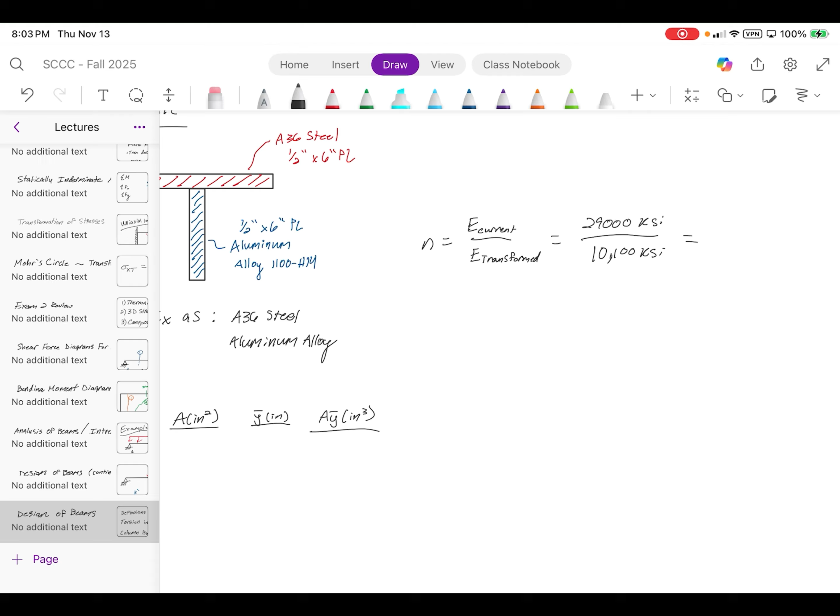The reason being is because the steel, you need... hold on a minute, let me figure this out now. Yes, you need more aluminum to equal the stiffness of the steel. So because of that, when you transform the steel, your section is going to get larger even though the stiffness is smaller to compensate. So because of that, this is transforming steel to aluminum.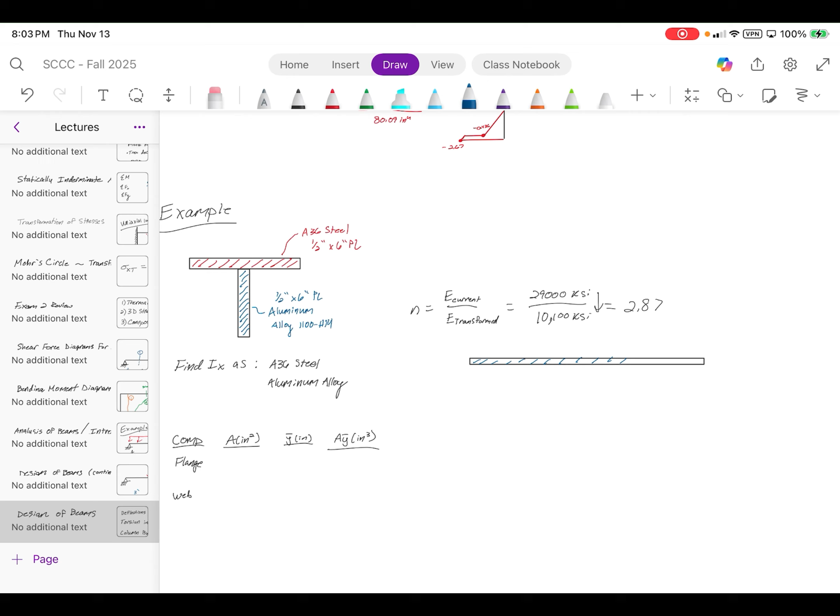29,000 divided by 10,100 gives us the 2.87. We both agreed that that's the modular ratio. I think there was just a mishap with the definition. But basically, what this means is the steel is equivalent to about this much area of aluminum. So this is just going to be, the area is basically just going to be 1/2 times 6 times 2.87, and that's the equivalent area for the aluminum.

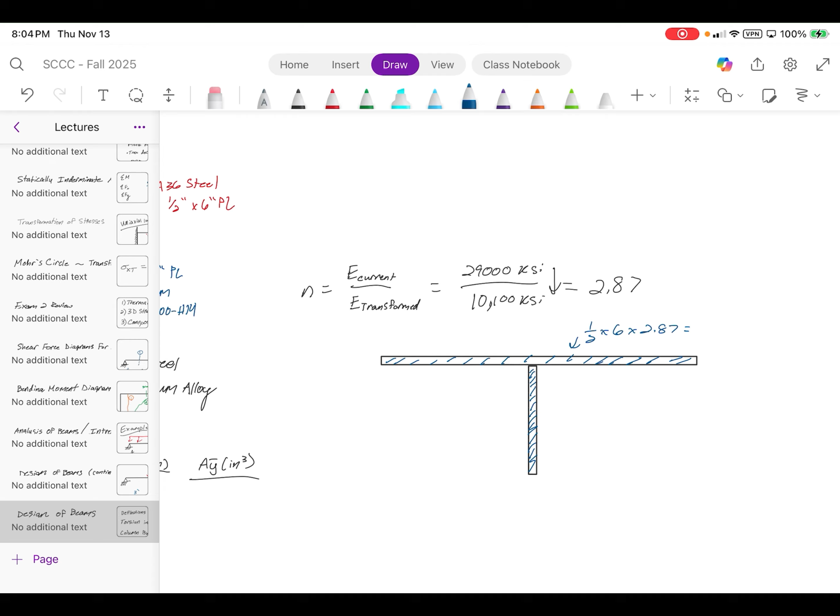I'm sad that everyone was wrong in this except for Michael, and Michael even doubted himself. So he's even technically wrong, even though he was right.

So really, this adjusted width becomes 6 inches times 2.87, which gives us 17.23 inches. The height is still a half inch. This is still a half inch by 6 inch plate. So the area of the flange becomes 17.23 times the half inch, which is equal to 8.614 inches squared.

Does everyone see what I did and why we're doing that? Yes, I'm just a little confused. Okay, so I thought you were...

The modular ratio relates the stiffnesses of one material to another. The material we are transforming into is always in the denominator, as I said earlier. So if we want to transform the steel to aluminum, the stiffer material goes on top. Think of it this way: you need this much aluminum to equal this much steel. Otherwise, if you're increasing the area of steel, you're just significantly increasing the stiffness. You're trying to find an equivalent material to match the stiffness. The way you kind of did it, you just increased the stiffness of the steel, which in turn makes the aluminum worthless.

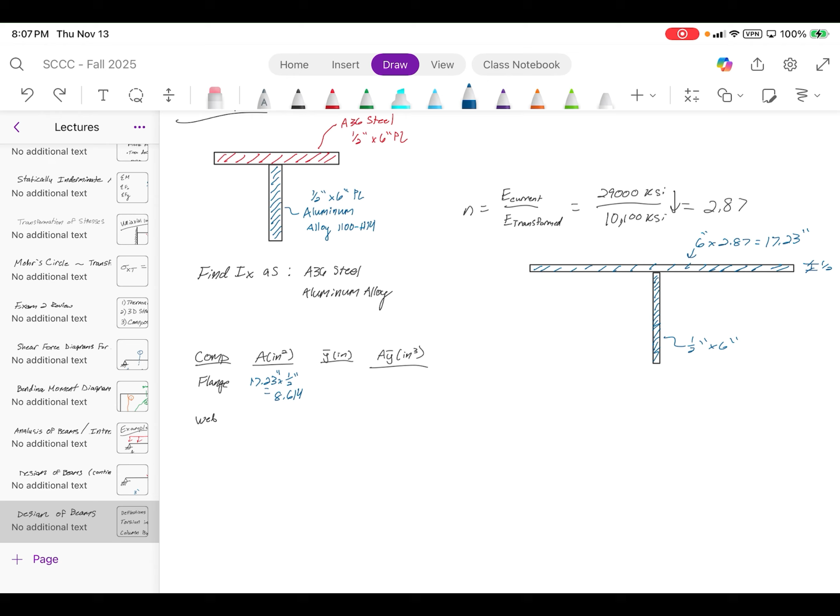So that gives us an area of 8.614 square inches. For the web, we are still at 3 inches squared because it's 6 times 0.5. Next, we need Y bar. Because this is not symmetric, we have to calculate this individually. The Y bar for the web is going to be 3 inches from the base, and the Y bar for the flange is going to be 6 plus half the half inch, so it's going to be 6.25 inches.

Lastly, just carry it over. 53.84, 9. And then you just do the math, just give me a minute. We get 25.84, 2 here, and then plus 9, we get 62.837 here, so that means our total Y bar is roughly 2.432 inches. Is that what you got initially, Michael?

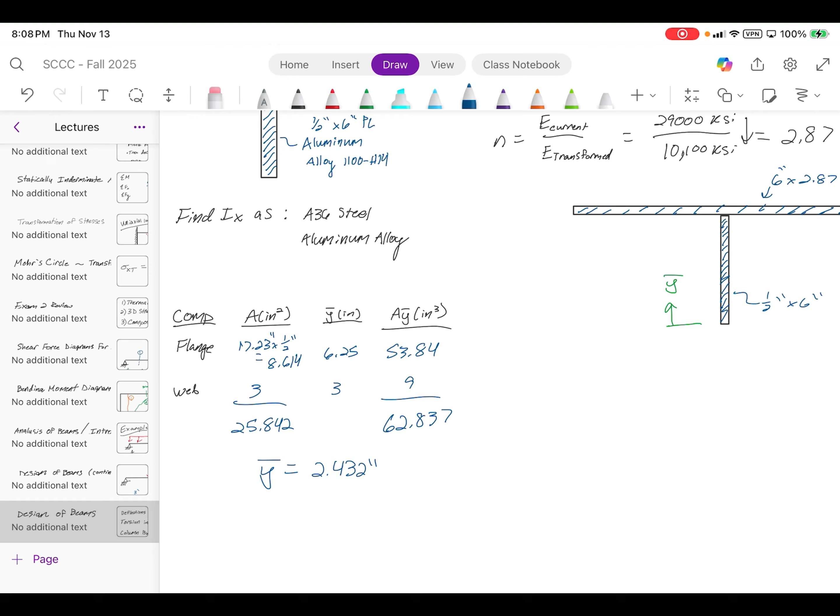You get 25.8. I multiplied it by accident. 8, 9, 10, 11. First mistake of the semester. So 62.837 divided by 11.614, that makes more sense - a Y bar of 5.41 inches. Yeah, that's what I got. That's what you got.

Good. Now from there, we need to calculate dy in inches, A dy squared in inches to the fourth, and then IX in inches to the fourth also. dy is just going to be the total Y bar minus the Y bar of each component. And so we get, for the first one, 0.84 inches. And then for the second one, we get 2.41.

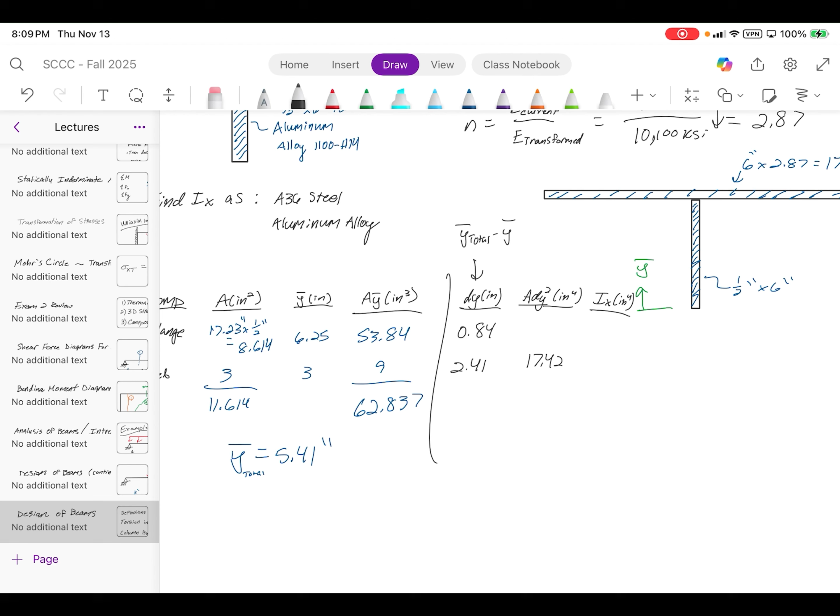3 times 2.41 squared gives us 17.42. And then 8.614 times 6.25 squared gives us 336.48. And then for IX, again, we're dealing with rectangular shapes, so use BH cubed over 12, which for the web is going to be the half times 6 cubed divided by 12, which is 9. And then the IX for the flange is going to be the 17.23 times the half cubed divided by 12, which gives us 0.18.

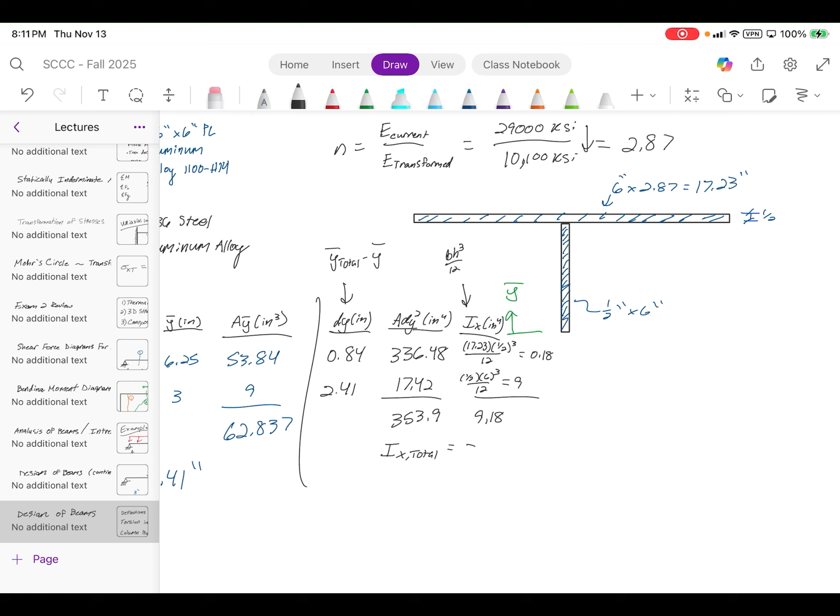Lastly, just add all of your numbers together. For this one, we get 353.9, and then 9.18, which means our total IX is equal to 363.08 inches to the fourth. And this is in terms of the aluminum.

Is that what you got? Now, if we wanted it in terms of the steel, take that value and divide it by that 2.87. And that gives us 126.51 inches to the fourth in steel.

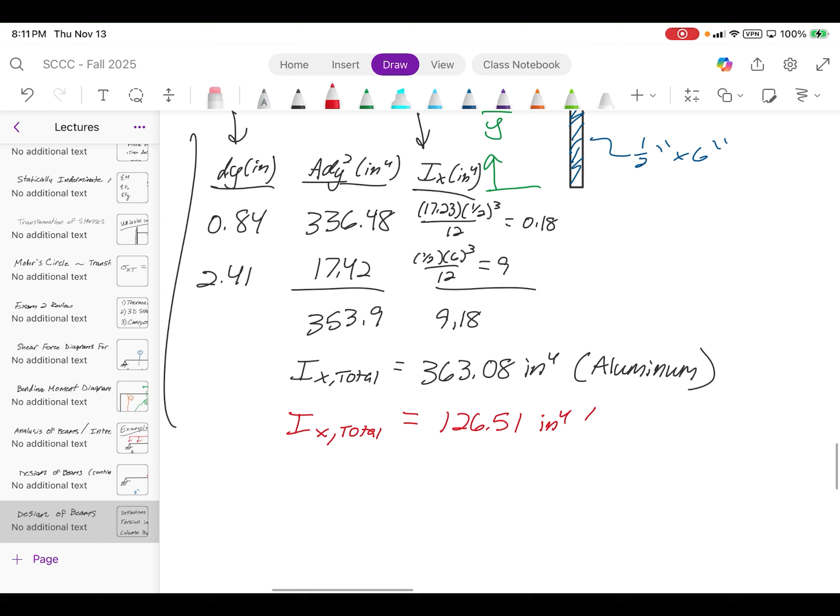Yes? How did you get Y bar again? The Y bar is taken as the sum of A times Y bar divided by the sum of the areas. So this would be that sum of A Y bar, and then this is just the sum of the areas. And so it's just the 62.837 divided by the 11.614.

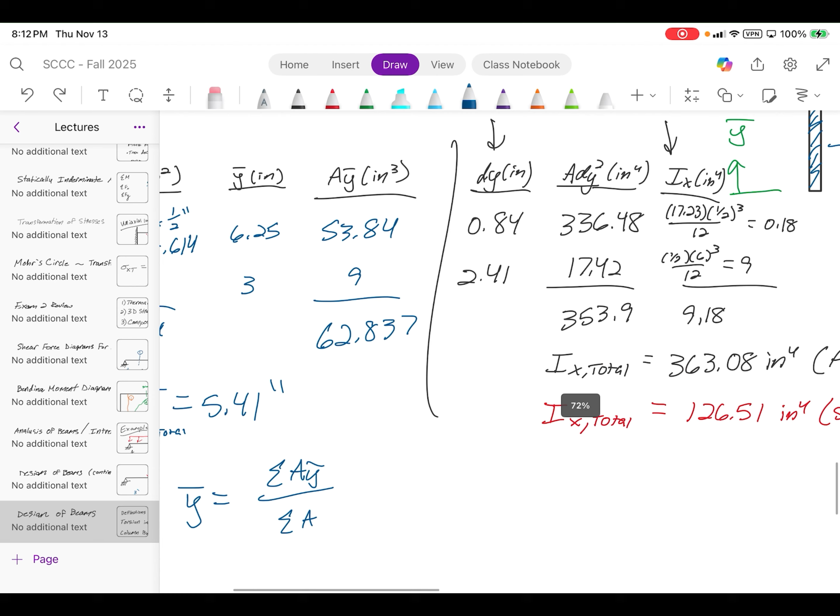Are there any questions about this? And to get the steel, you divided it by the modular ratio, yes, which then you can use in calculation to determine the stresses. Is this an actual second moment of area, moment of inertia? Not really. It's just a hypothetical that we're using for mathematical purposes, because again, it's just a section property for a given material, so there's not really one true section property or cross-sectional property for it. It just depends on what your given material is.

All right, time for your get out of jails. I'm kidding, I'm not an evil human being, I promise.